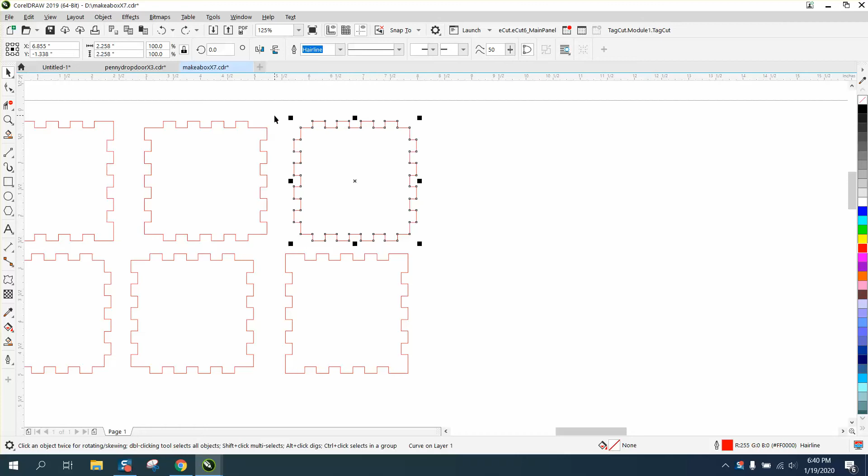Hi, it's me again with Corel Draw Tips and Tricks, and this is another video about this new software called MakeABox. But I'm going to try to answer two questions at one time. Somebody wanted to take my penny drop box and make it a 1/4 inch. The only problem is that this center piece, you'd have to change all these tabs, and it can be done, but I thought I'd do it on this box.

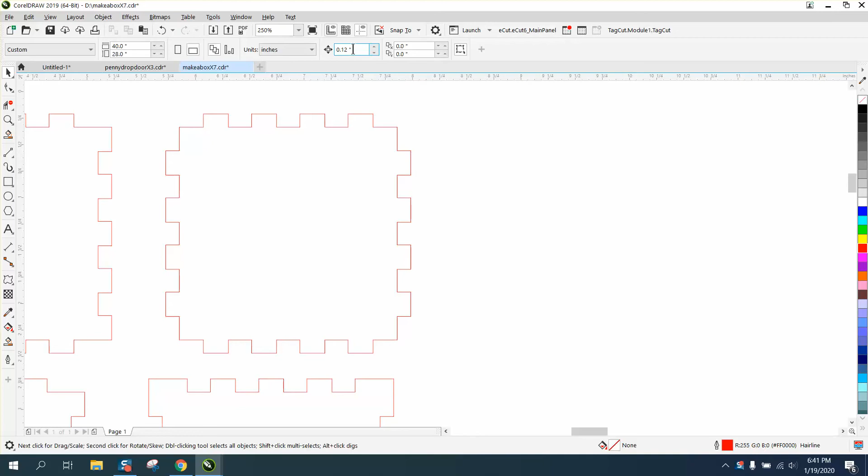So this is, well, let's just get our parallel dimension tool. And from there to there is your thickness of your wood. So it's 0.13, which is a little bit more than 1/8 of an inch wood. But if you wanted to cut this out of a 1/4 inch wood, set your nudge factor on 0.12, grab your shape tool, select your item, select all those outer nodes and just nudge them down, to the right. Nudge these up, nudge these to the left, nudge these to the bottom. And now it'll fit a 1/4 inch.

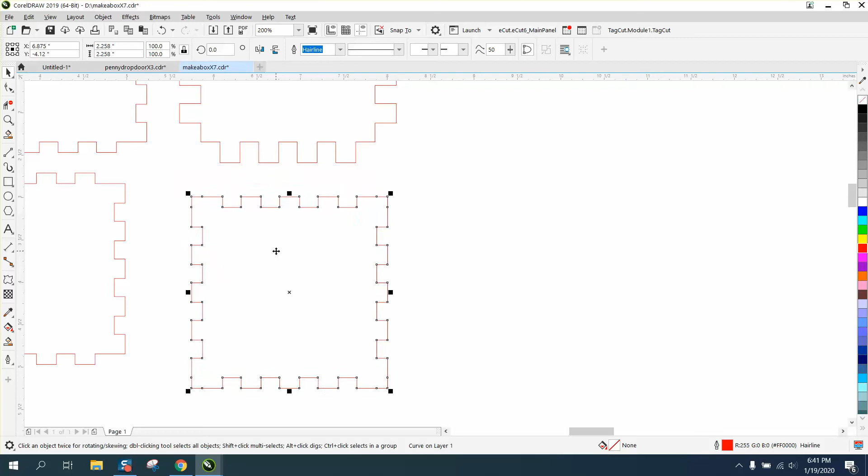And if you do that now, this one's a little bit more in depth because you've got two sets of nodes, but it's the same principle. We're gonna select all those and go that way, and select all these and go this way. That makes this piece quite a bit bigger, but it'll work. So just grab those nodes and left click, and now I'm gonna bottom arrow. So now this thing, if your joints fit for the 1/8 inch, it'll fit for 1/4 inch now.

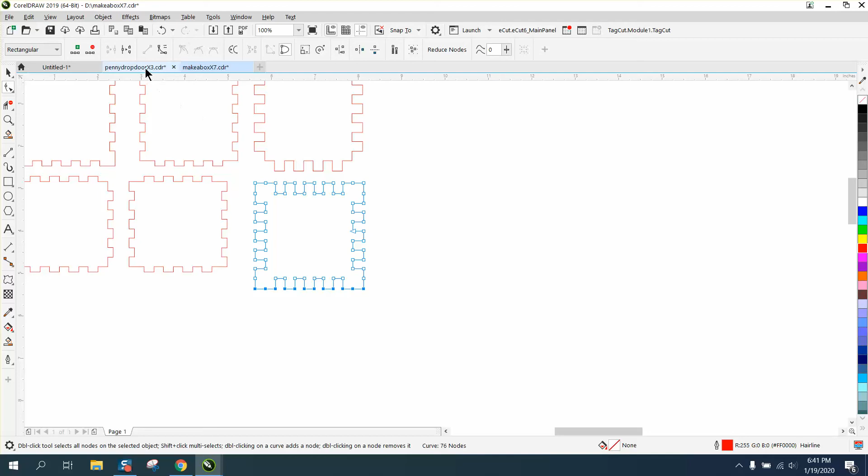Then go up to save. Whoop, I don't want to print it. Go up to save and save it as, I'm going to call it MakeABox 4, and hit save. Now we'll go into Corel and we'll go to File, Import. MakeABox 4, it's right there. Import it.

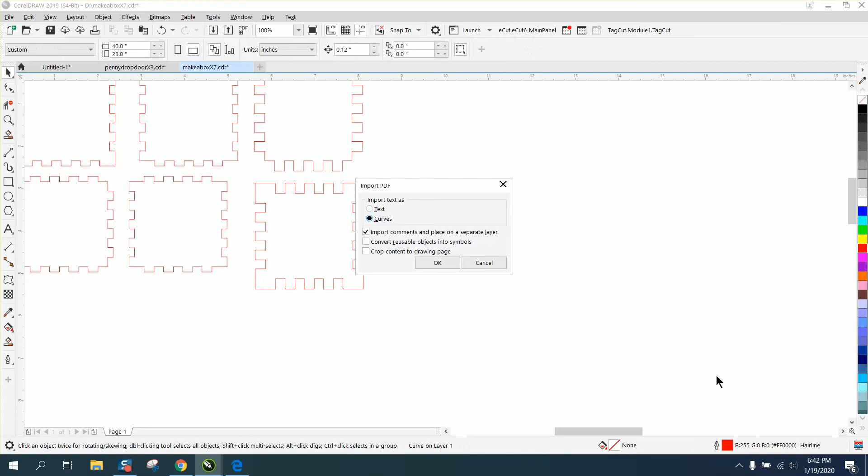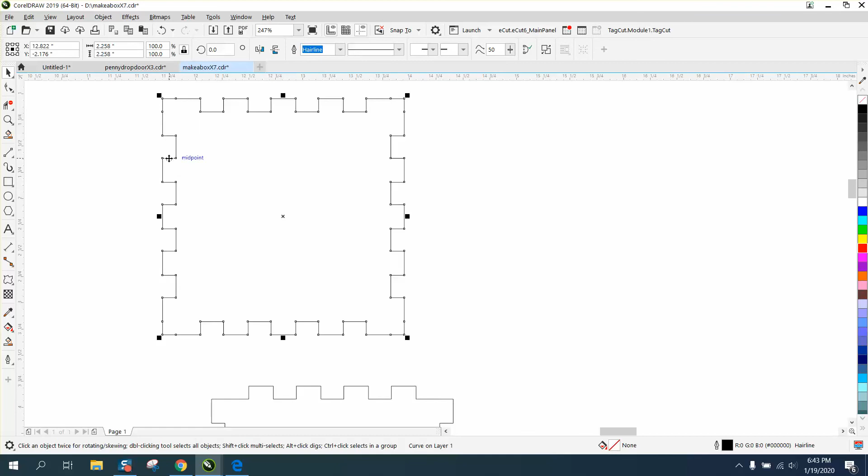That's changing the text. Now my space between the pieces are a lot bigger, so I could grab it now if I wanted to, because we said before, once you ungroup this, you're gonna ungroup every little piece of this. So now it'd be a lot easier to combine it. I still like my way of using the Smart Fill tool, but that would be another way. And so that way they're further apart, so you can get around them and just go to Control L. Grab this shape, Control L, and now it's all one piece.

Now the only difference between this and the Smart Fill tool, you have to touch the line. Where if you use the Smart Fill tool and you fill that in, now it's all one piece and you can grab it without touching anything. You can just grab the center and move it around. You don't have to be right there on that line. You could be anywhere.

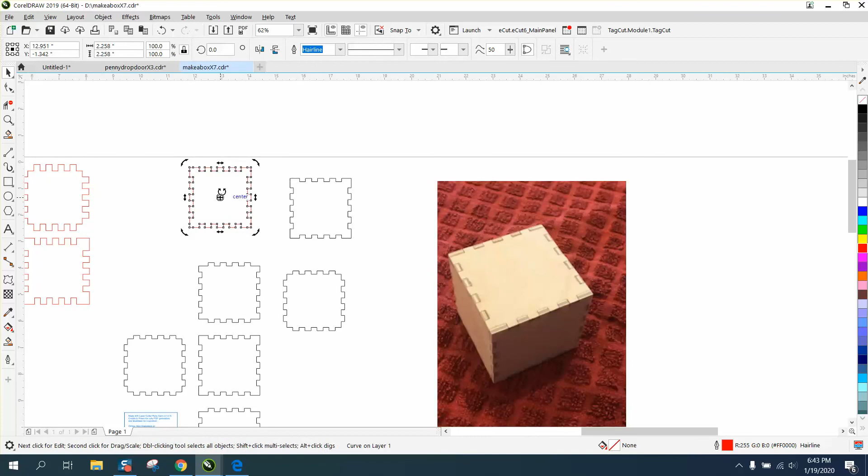So try out that new free software. It's pretty cool. It's makeabox.io/#. And you can change it. You know, you can make your 1/4 inch box right here just by typing in 0.125 or 0.25. You could change your tab width. I still don't know what the stroke is, but it's pretty cool and it's free and it's pretty easy.